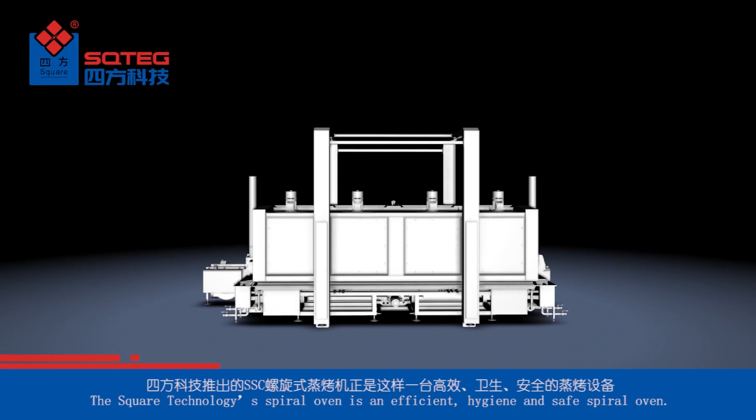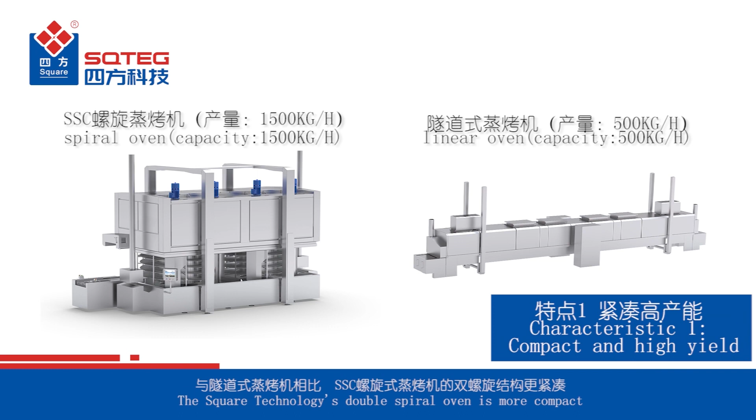The Square Technologies spiral oven is an efficient, hygienic and safe spiral oven. The Square Technologies double spiral oven is more compact, takes up less space, and has a larger capacity range than the linear oven.

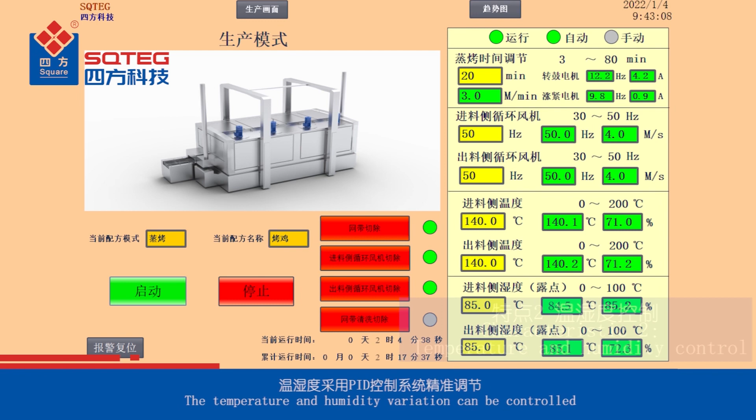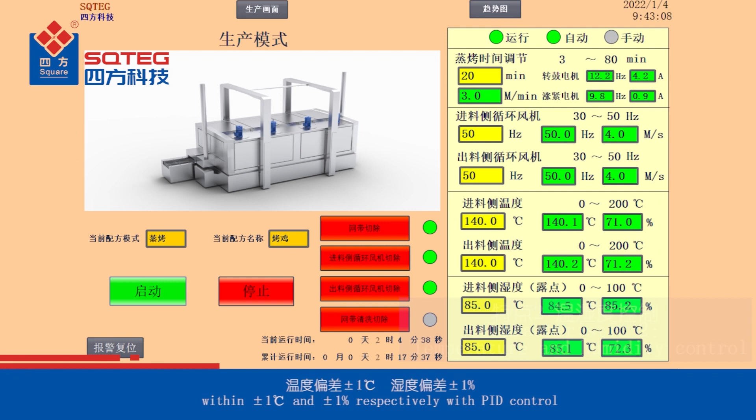The cooking process requires precise control of temperature and humidity. The spiral oven is equipped with sensors to monitor the temperature and humidity in real time. The temperature and humidity variation can be controlled within plus or minus 1 degree Celsius and plus or minus 1%, respectively, with PID control. The temperature and humidity of the two spirals can be controlled separately.

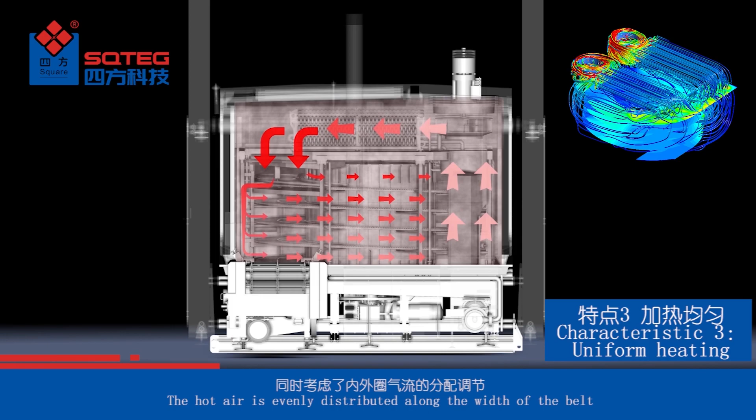In the spiral oven, the food is evenly heated by air flowing from all directions. The spiral oven combines vertical and horizontal airflow. The hot air is evenly distributed along the width of the belt. All these features ensure uniform coloration.

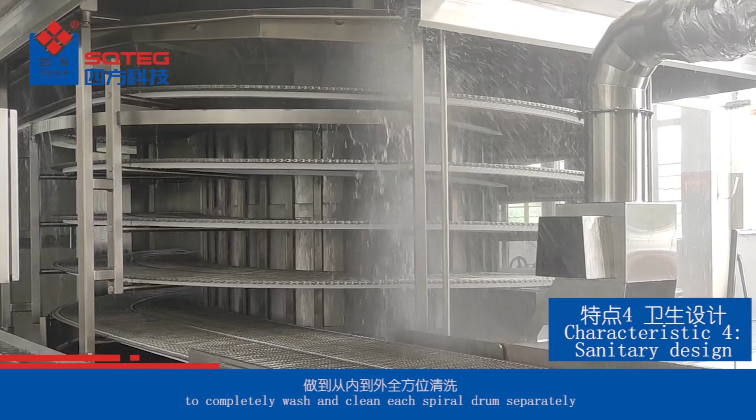Keeping the spiral oven clean from the oil left by the food is important. The spiral oven has a CIP system to completely wash and clean each spiral drum separately. The belt washer in the infeed can remove the oil and residues efficiently.

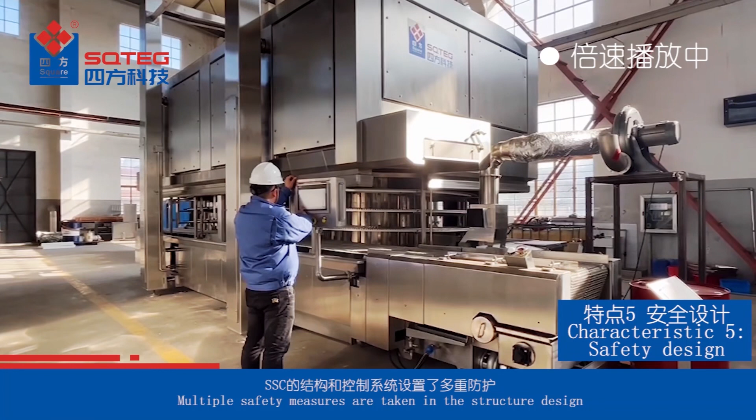Safety is the priority for a spiral oven operating at high temperature. Multiple safety measures are taken in the structure, design and electronic control to prevent burn or crush injuries. Multiple emergency stops are provided to turn off the machine quickly in emergencies.